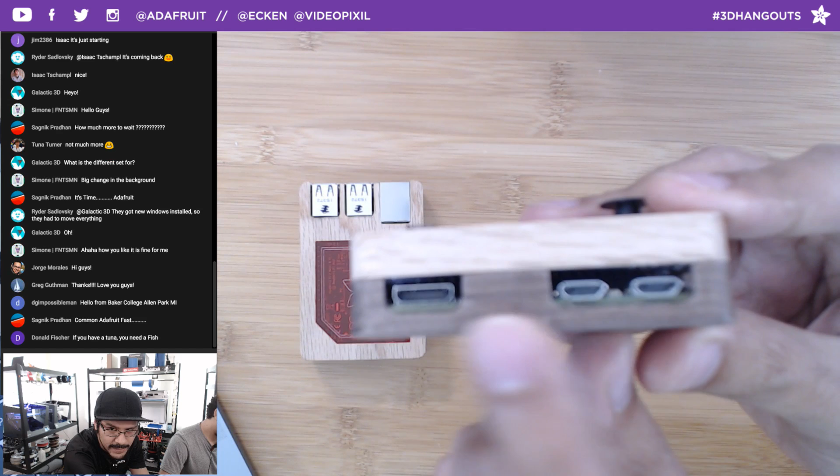The main thing, since we didn't do a show last week, let me show you - last week's project was CNC milled. This is the Joy Bonnet with the Raspberry Pi Zero. The one thing I wanted to do differently is take a look at these cutouts - they're kind of big. When you're using a 3-axis CNC mill, you can't make these undercuts or overhangs.

So what I end up doing is having to start the opening from the top of the case all the way down. These are two pieces, and you can see the cut is all the way from the top. So one way to combat that was to make this interesting little faceplate thing that is milled flat on the bed, oriented this way. This way you can get these nice and pretty holes and play with different materials you can see in there. That was pretty neat.

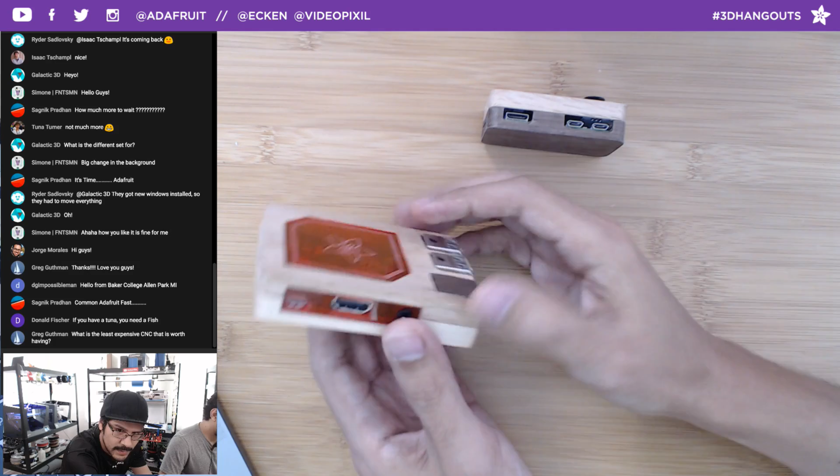Another thing is this is all friction fitted. I haven't done a case that's friction fitted before, so I had to guesstimate what the tolerances would be. For a 3D print, this would probably be a tolerance of like 0.2 or 0.3 of a millimeter, sometimes even 0.4. But for CNC milling, 0.1 was the offset I had on this inner lip. This little inner lip slides into the inner wall of this case, so that's how the two are held together.

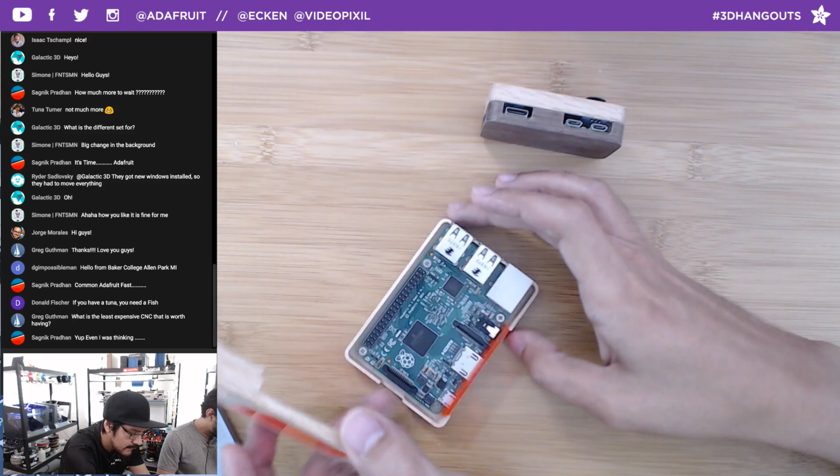I really didn't want to use screws to hold the two together. A lot of the time when you CNC something and need two halves to fit together, you end up using long screws to sandwich the two together. But depending on your application - I'm not going to be moving this around too much - so that's why I wanted to try this lip method where it snaps into the second half of the case. The other thing was these little things here.

I typically wouldn't add this for a 3D print, but I thought I'd give it a shot with this wood. It seemed to work out well. Another thing that didn't work out was the tolerances here - there was a bit of a tolerance issue, there's a recessed area here, so I ended up using E6000 glue to just glue these two pieces together. That ended up working fine.

This is done with an engraving bit, an 80-degree chamfer tool, on just an eighth of an inch piece of acrylic. So that's how that works.

So I put together a guide on some of the things I learned. If I switch to the guide, you can see a little bit. I'll walk through it very quickly, starting with some of the design stuff.

So when you're designing your case, you need to be able to cut in between things. An example here is that standoff you see. I had to increase the overall dimension of the case so I could actually get in there and mill in between those areas. I did want a really thin, slim case, but you can't get smaller than the tool bit, so that's why I did that.

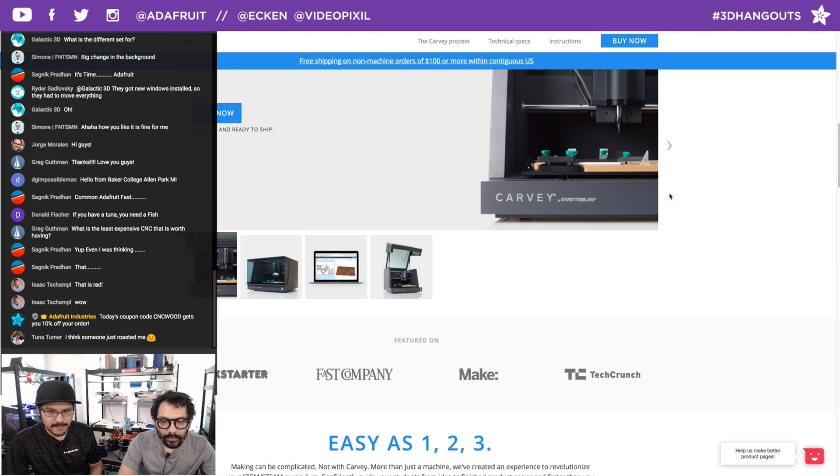The Carvey is another good option. It's got a bigger build volume. It's $2,500. The software looks pretty good. The spindle, though, maxes out at 12,000 RPMs. It uses the same collet, the ER11 collet, so you can use the same tools. It's a good option if you don't want to do PCBs with fine pitch, you can try this out.

Supports G-code. Another one, this is the thing Pedro was talking about, this is the one from Carbide 3D. This is the Nomad, fully assembled. I think it's fully assembled. I sure hope so, I would be surprised if it's not for 2,500 bucks. It doesn't come ready to run out of the box though. It has MeshCAM, so you can turn your STLs right into your G-code, which is kind of nice.

I think the RPMs max out at 10,000 RPM, but it's got a pretty decent build size. I think it's 8 by 8 by 3, so it can do some nice depth, 3 inches.

Yeah, and again, fully enclosed, nice spoil board. It has some nice built-in probing, so it'll probe itself every time. I think the Carvey does the same.

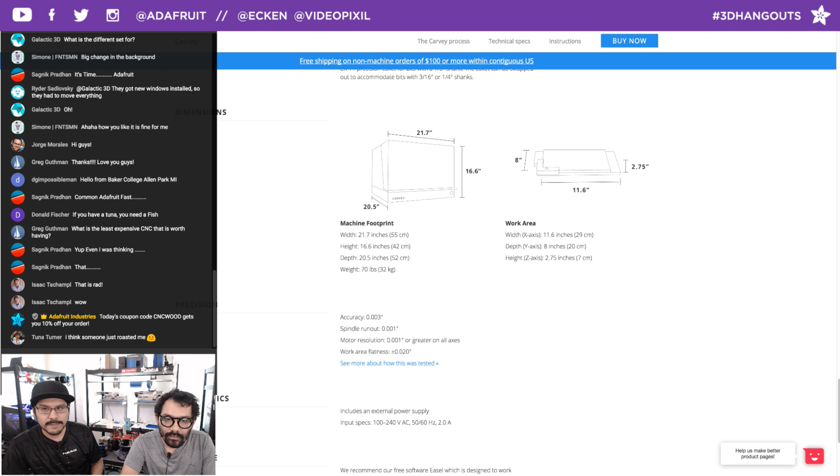But somebody in the chat on YouTube mentioned openbuilds.com. So if you really like building your own machines, check out Open Builds, and you can build your own for I don't know, $100 or so.

The Shapeoko is another thing, but I'm not sure if I could recommend that. Kirby has one, and I think Phil B might have had one, but the assembly instructions are a little bit iffy, so I'm not sure if I can recommend that.

I think Todd had one as well, and he had to do a lot of workarounds to get it assembled. Yeah, I remember he had an X-Carve too. The X-Carve comes in a kit, or I think fully assembled. I'm not sure. But anyway, a lot of options out there.

Nice little tutorial for anybody wanting to make that transition from 3D printing into CNC.

This is more like a book report than step-by-step instructions on how to set it up. All of the paths are going to be different for different machines, especially for different stock. So my G-code's not going to work with you, but you could offset it, though I'm not sure if your software can offset it. So, hey, options are out there.

Cool, so that's this week's project. Hope you guys like it.

And last week's too, just in case, since we were gone, we just wanted to mention the Joy Bonnet. We have a Raspberry Pi Zero on the inside.

So just hook up a monitor and you're ready to start playing all those console retro controller games, which is pretty cool. It looks pretty tiny, and the buttons are laid out pretty nice, so it's not so tiny that you're going to be mashing two buttons at the same time.

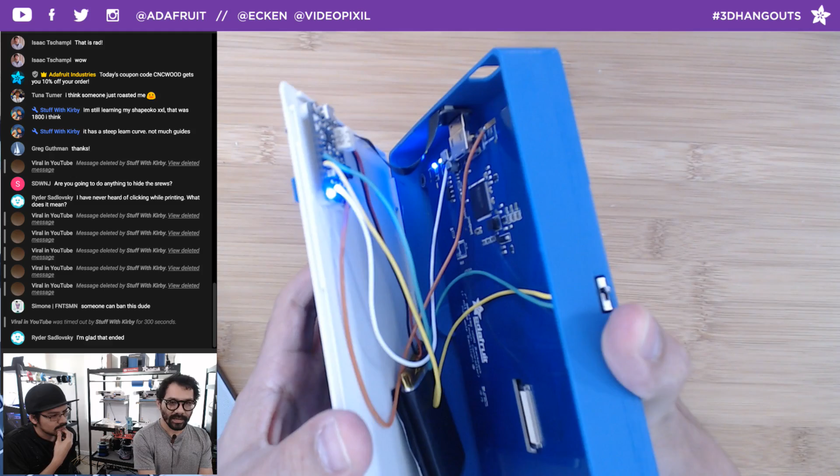Oh yeah, and of course, like I said, it is a rework, so all of the attachments for hooking up all of the mounting - instead of using screws everywhere like we did on the last one, we're using all of the very fancy nubs that Noe started using on all those. So very easy to disassemble, take a look at that - everything is just snap fit together. It has a very nice tight tolerance on that, so they can all stick inside there without having to use any screws.

Add nubs to all the things. Yes, that's good - well, I couldn't add it to the sword. I really wanted to add nubs to the sword, but there's just way too many curves on that, so it's easier to use screws. It really depends on the project - if it's just a nice box, it'll work perfectly for that. But we'll talk about this more afterward, after the sword. So really close.

Did you want to highlight the... the what? The HDMI connectors, like show them off individually?

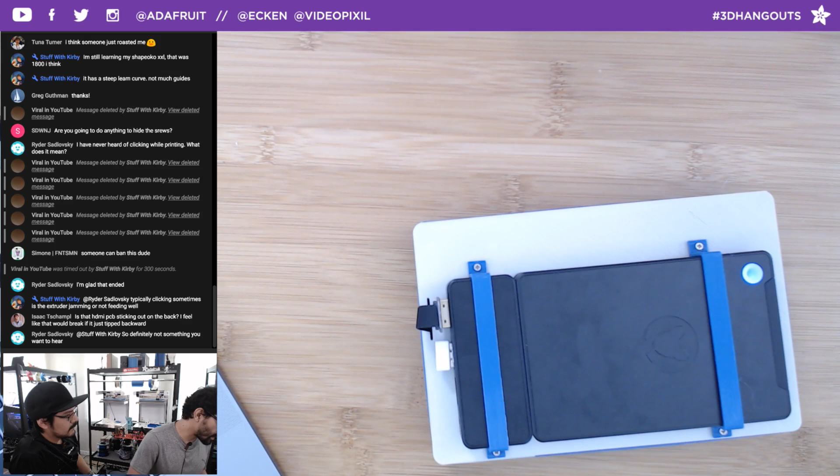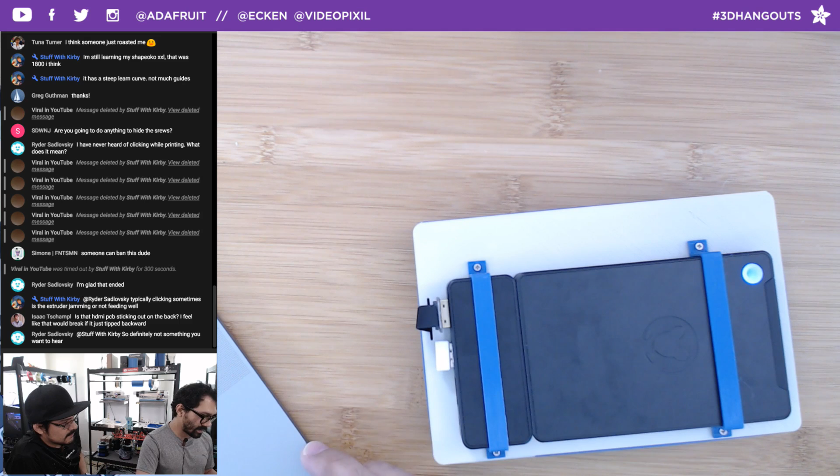Like I said, this never works, it's one of those things where you finish one complete build and it's like, oh yay, let me just print another one, and it just keeps failing on every part. So it goes to having to do a weekly project.

All right, cool, let's take a look at this week's layer by layer. I think you have one I do, the Joy Bonnet. I'm going to publish that later today, probably around 3pm Eastern time, but I wanted to show you guys real quick what got me excited about this one. So let's go ahead and flip to this guy and then go over here. So this is the Joy Bonnet.

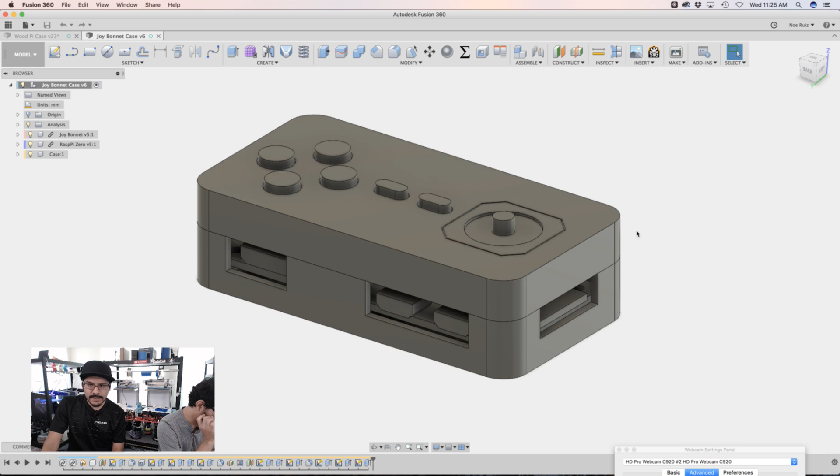In this week's Fusion 360 tutorial, I show you how to assemble this bottom piece here for the Raspberry Pi. But one thing I really wanted to show you guys is how adaptive this design can be.

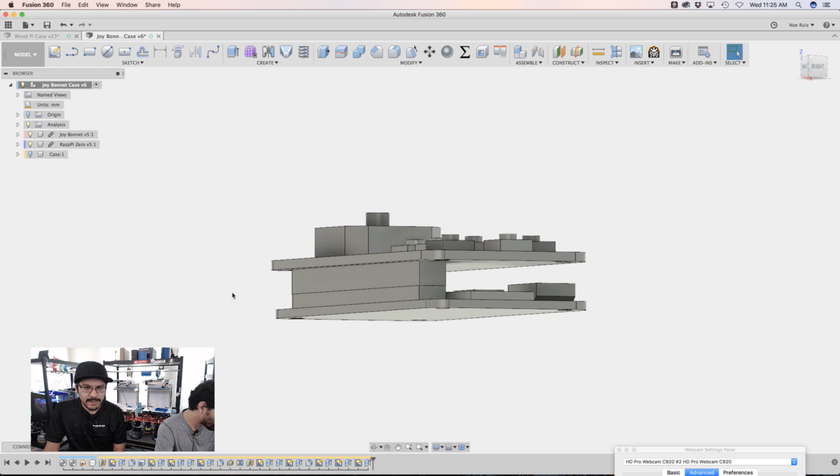Let's take an example where these two pieces are pretty flush together, but let's say we don't want them to be flush. Let's say we want to use the regular headers that aren't low profile. That means the distance between these boards has to be a little bit bigger, right?

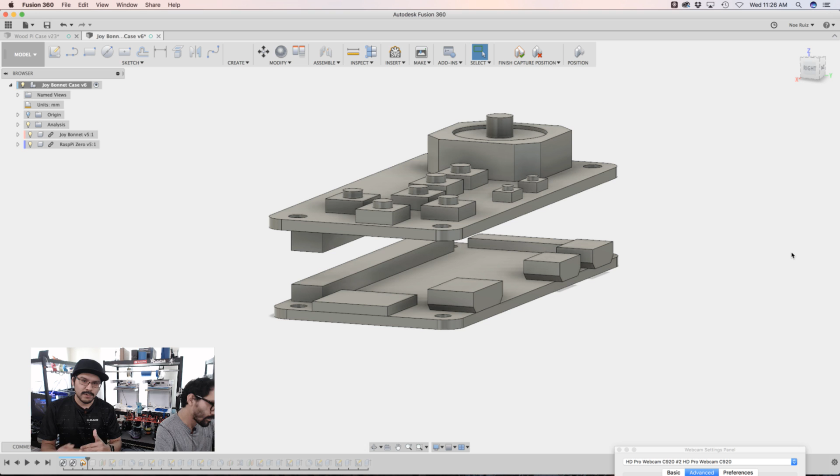So if I go in here to my capture position, I can adjust this. I can say the Joy Bonnet is actually a little bit more elevated, maybe 5 millimeters. When I hit OK, normally what we would do if we designed it a different way, you'd have to update your extrusions.

But in this case, when I hit update, hopefully everything gets updated. Look at that, a little bit different, but you can see what's happening here - the cutouts are adaptive. They're growing with this bottom piece here in the surface.

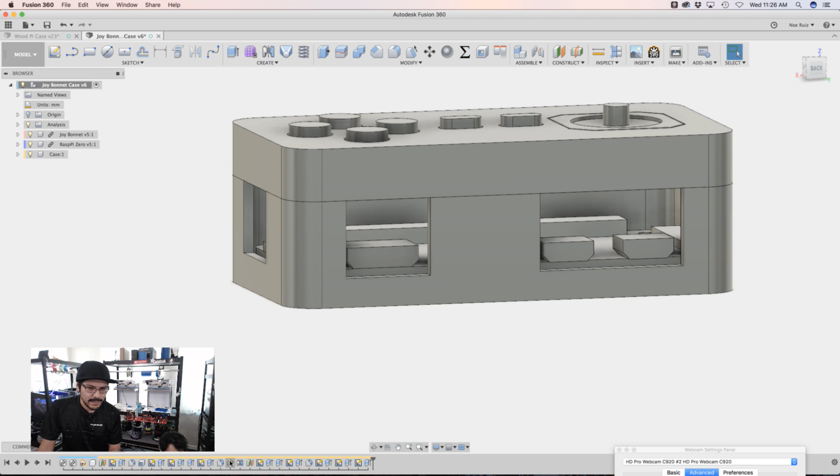The way that's happening is I'm using a construction plane to do that. So if we go over here into this little construction plane, everything's being derived from this construction plane. Can't seem to edit it, so let me hit edit feature.

Instead of having to readjust your surfaces or use the push and pull command to push things out, I can just update this construction plane, the offset for it, and things automatically get updated because I'm drawing on top of this construction plane.

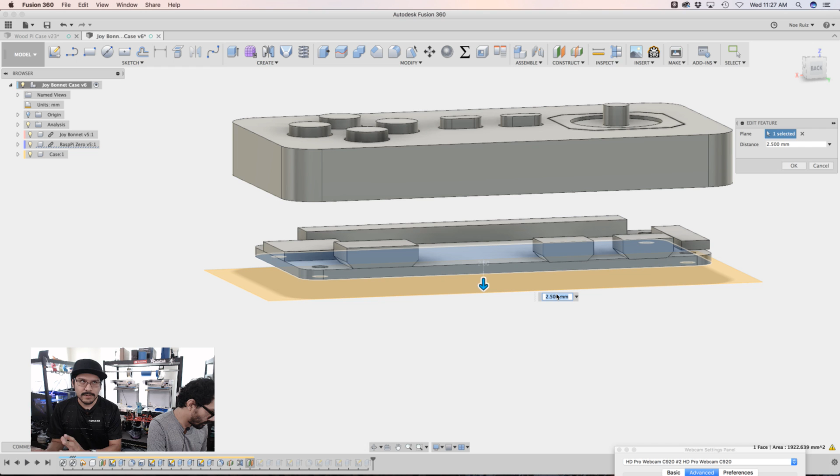So I'm going to change this to like 5, and you can see that I just moved 5. Not only that, but it's parametric in the sense that if I do section analysis, you can see the standoffs have even updated - those are the corner standoffs back there. They've automatically updated, and I don't have to do too much.

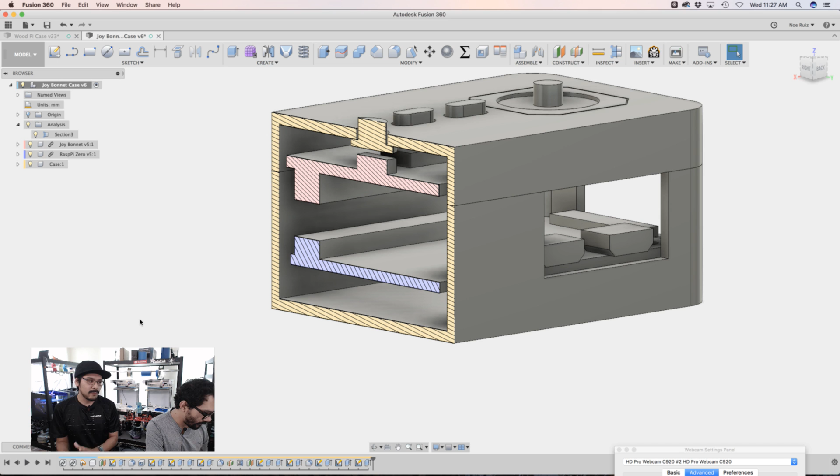So really quick way to modify your design and not have to do too much work, because a lot of times I do a lot of changes and I have to start designing it in a way where it's adaptive to those changes. I'm really excited about that. I'm starting to use construction planes more and more these days because they work really well.

Of course, using your extrusions when you're extruding stuff, instead of adding a distance - let me see where I do that, which is typically what I do - you see that extrusion, it's not actually a number, it's saying there's an object behind it, but the number is adaptive. It'll always update whenever this surface is changed. That's why it's updating like that.

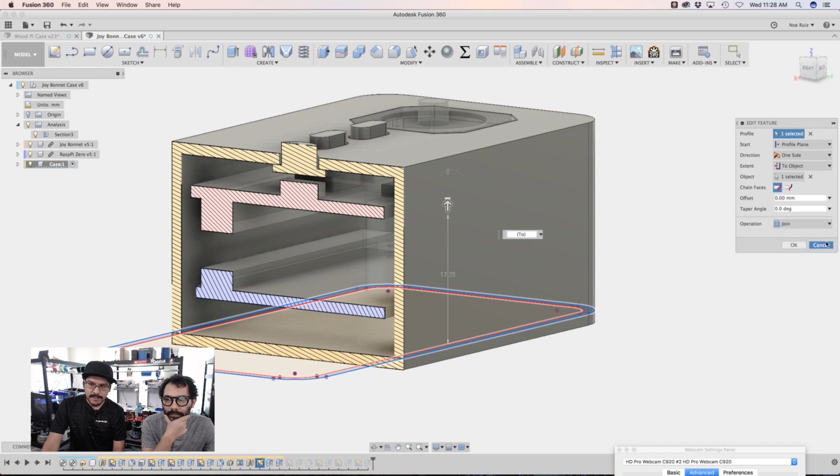So let me just undo all that. Pretty cool, I'm really excited about that. I'll be doing more of that type of stuff.

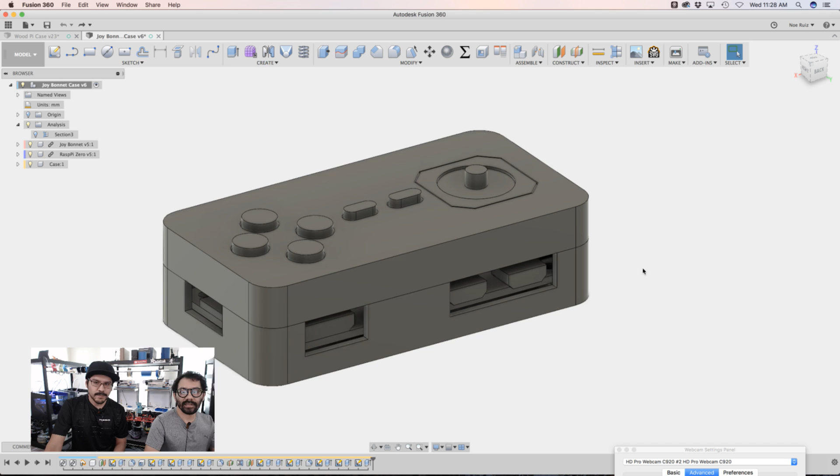Hopefully that helps anybody out who's working on a project where you're designing for changes in mind. If you don't need that, then you don't have to design this way, but whatever you're printing, you're definitely going to need it somewhere down the road to change something - for tolerance testing it's a great thing, I think. But it might be a little bit different. I talk more about that in layer by layer. That's just one of the quick things I wanted to show off. Check it out.

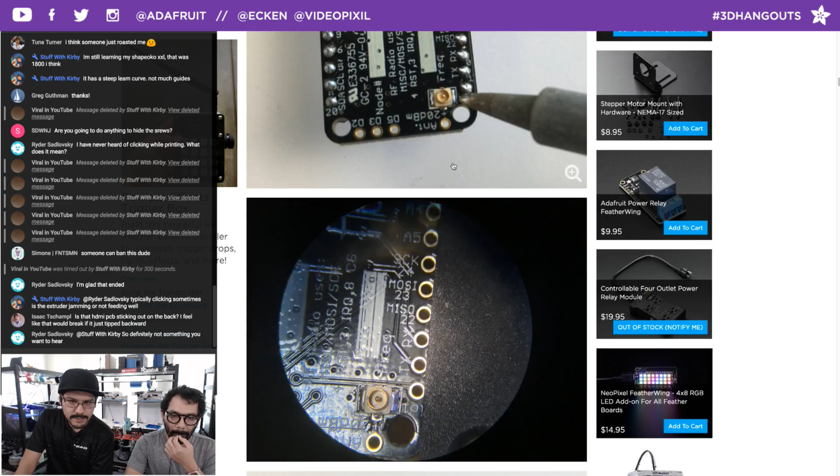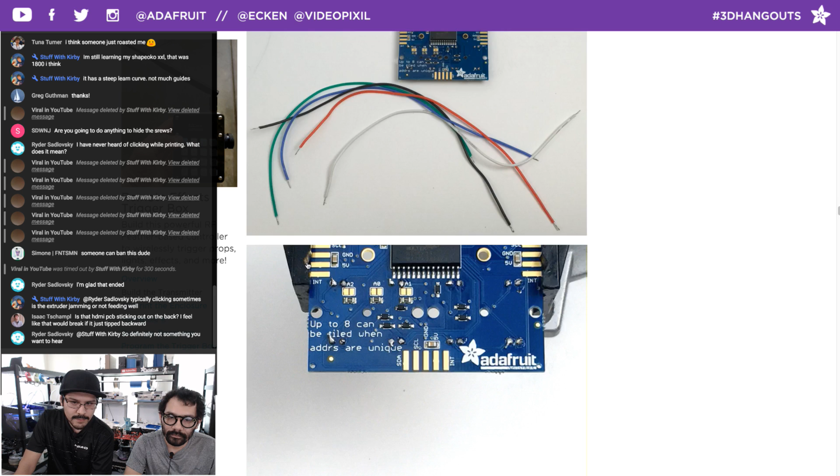John Park did a great job on the assembly instructions. Everything's really thorough and thought out. Circuit diagrams galore, and great use of the trellis for updated designs too, for remote triggers. He added the little switch holders and stuff like that.

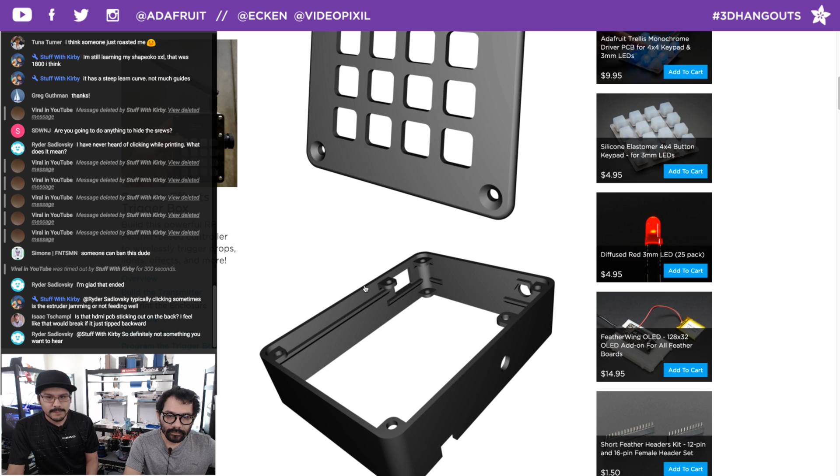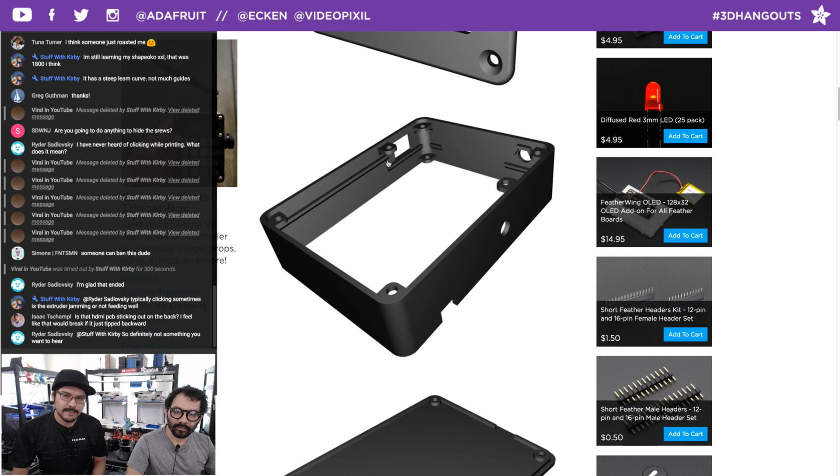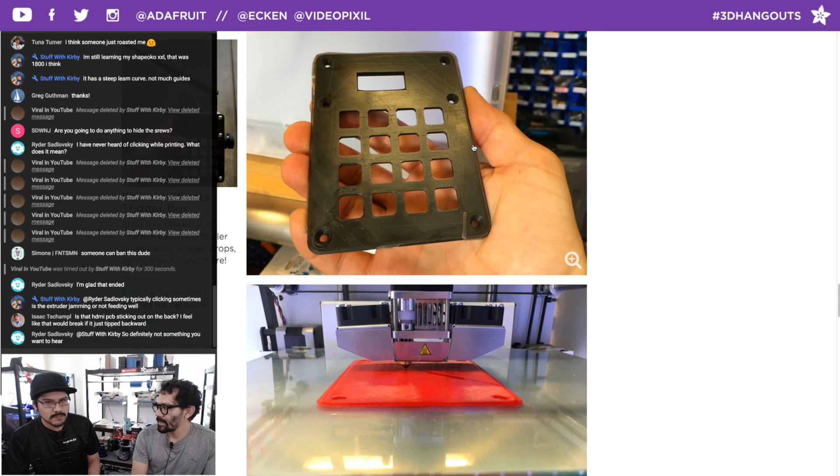So really cool. This was originally designed as a 123D design, so it didn't have much parametric options back then. But you can easily import this now into Fusion 360 and go to town with it, like adding a draft to those little tabs there. That's really the most difficult thing about some of the older projects we're reworking, because they were all designed in 123D and not editable in terms of adding dimensions. But once you get them into Fusion, they're pretty easy to work with.

It's just figuring out where all the, because of the way we used to design in 123D, there was like version 1, 2, 3 before we did a union or a boolean on it and all that. So, great guide.

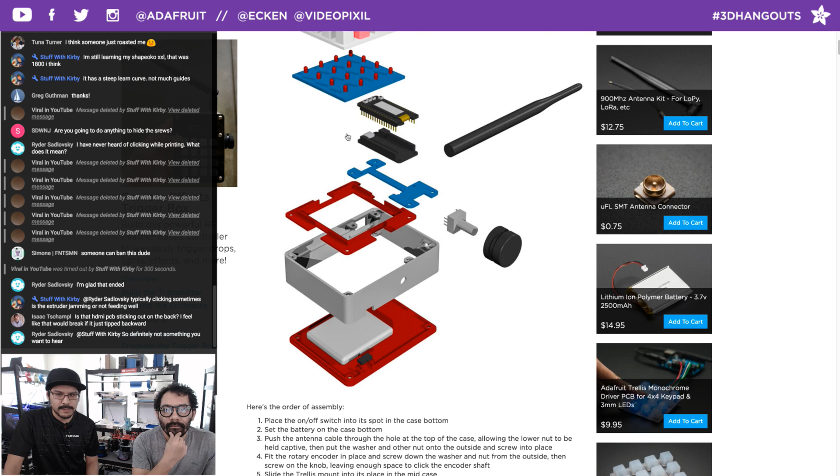Nice little battery holder too. Pretty cool, that's a nice way to do supports for materials there. So a lot of great little tips you can take away from this, even if you don't want to build this project. You can still kind of walk through it and see, and it could be for any project too. You'll walk away with some really good tips.

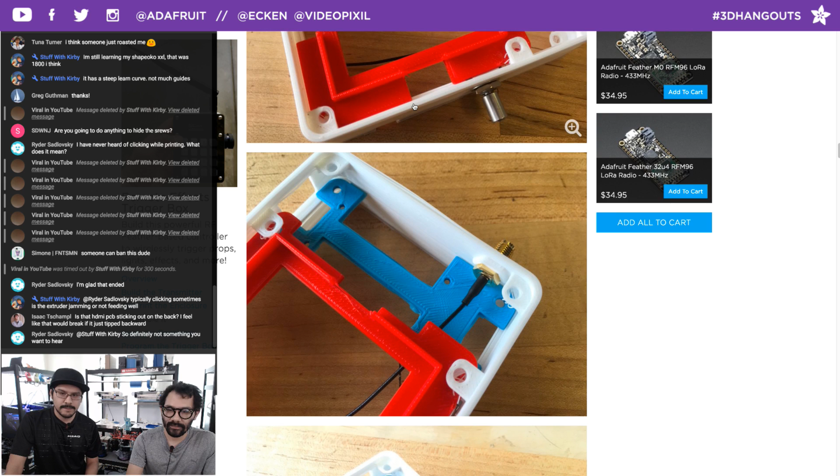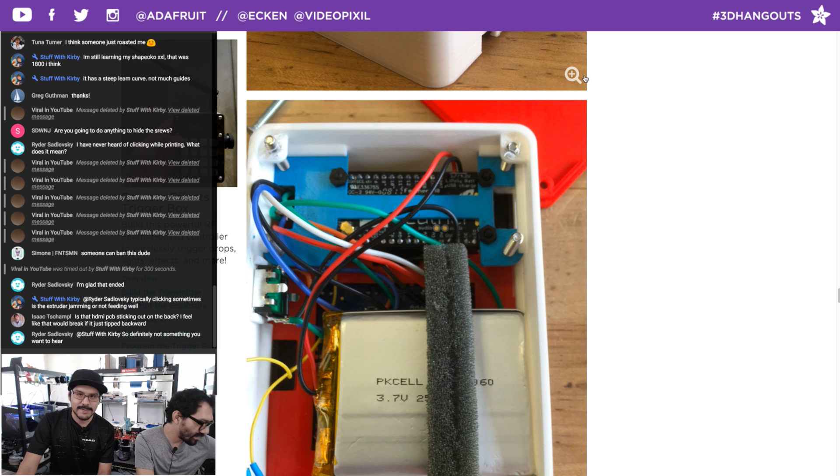This is pretty cool, definitely one of them. Great use of those M2.5 screws. I could be looking at this all day. It's a nice, long, lengthy guide, so get your cup of coffee and just read the John Park guide. Check that out, that's of course at learn.adafruit.com, right on the homepage there.

Next up, we got, we were talking about the Supersoft HDMI cables. You wanted to recap on the failed Ninjaflex wheel experiments. Oh yes, I completely forgot about this.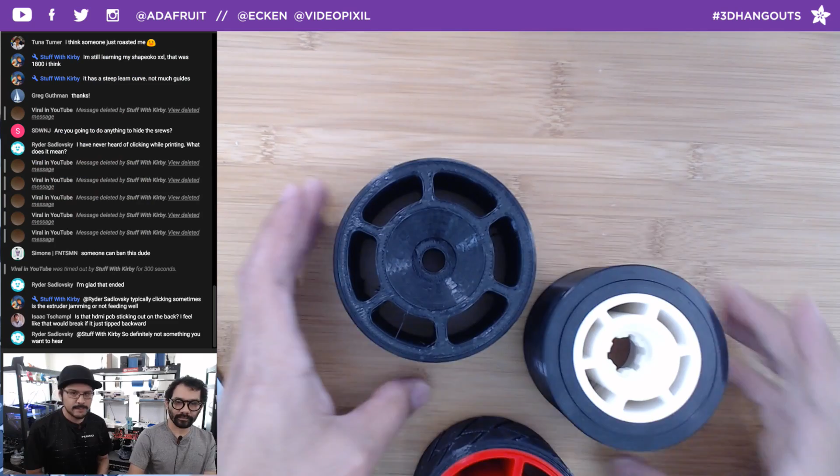So a couple weeks ago I really wanted to experiment with making a 3D printed wheel for my longboard. I wanted to use Ninjaflex and ABS to make this longboard wheel. So this was 3D printed, this red piece here is ABS, the black is Ninjaflex. This is a fully Ninjaflex tire wheel, just kind of prototyping and playing with the different shapes and trying to get the tolerances right.

This obviously doesn't work because it's too floppy. As you skate on it, it just kind of flops around, like a flat tire, right? This version, the tolerances worked out okay, I could skate on it, but there wasn't enough Ninjaflex so it was really kind of a hard ride. Didn't feel really good. So then I figured, just increase this and decrease this.

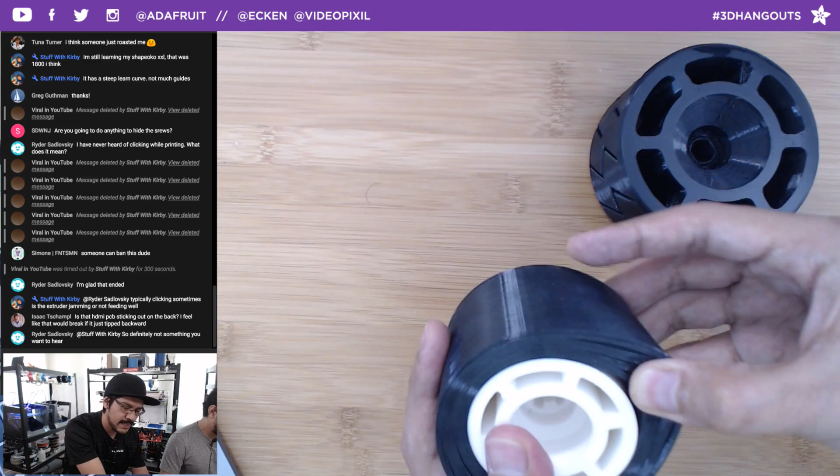So this is what I came up with. This is not dual extruded, it's printed in 2 separate pieces and they're joined together, not with glue, but with a little nub thing, a little key inside there. I can't take it out, so once you install it you can't take it out again. But the main problem here is that none of these layers bonded with each other, so they're all kind of loose.

When it was printing it looked like it was gonna be fused together. The only part that fused together was this Z seam here, the seam where everything's kind of looping on the perimeters. So this is all perimeters, like 4 shells, or maybe 8 or 10 shells. There's no infill, it's just all perimeters.

That didn't work well, so I kind of shelved this idea. Skating on this doesn't work well, it tends to fold in on itself, and these parts just didn't bond well. But this ABS part is definitely strong enough, this is all perimeters too, so it's like 100% infill in a way, but it's all perimeters. It's a nice clean tool path of just concentric patterns over and over again.

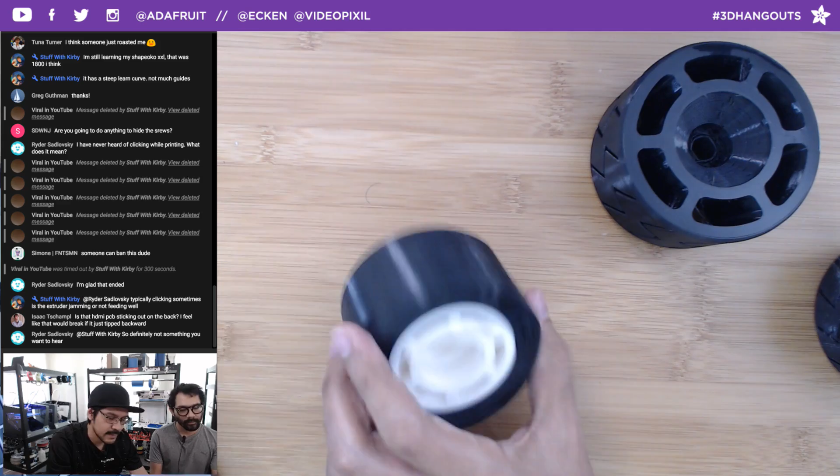But this was a fail in terms of does it actually work? No, not really. It fits, but the Ninjaflex just didn't fuse these layers properly. I could try messing with that, but I probably won't.

I moved on to a separate project. Instead of wheels, I'm now doing a truck riser, which I'll talk about next week. If you follow me on Instagram, you can see what I'm testing there - a nice integrated way of adding lights to your night rides.

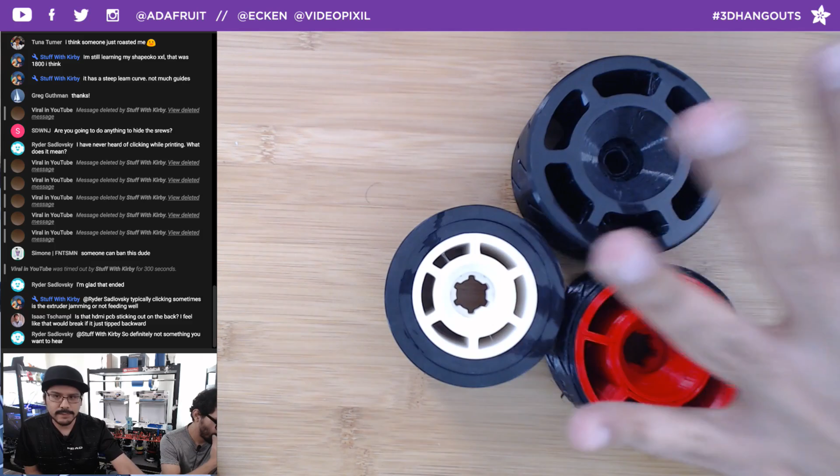I think that was a better idea because there weren't really any electronics here, just more material properties and seeing if that works. Although some recommendations were to make a 3D print to make a mold, then resin cast with LEDs inside. That could be a cool option.

Maybe we'll do it down the road. Another option for the truck riser - I really like that idea. The end goal is to send one to the Braille Skateboarding YouTube channel. They can skate it or break it. You make it, I break it - and they'll break it on the first try.

Can you imagine that? The truck breaking, landing on the 500 milliamp LiPo - that would not be cool. Like it's skating, and then it just explodes. First try, it exploded. I know Fetty would break it.

Anyway, under extrusion on that - for the wheel, I don't think it needs some of those layers. If you look at the zigzagging on the side, that's great layer bonding - there's no under extrusion here. It looks really nice. Look at the distance between the layers, it's connected on the perimeters. It's like the extrusion width just isn't enough.

It's just too thin. As you start increasing it, your tool paths start changing. So it's like, I really want these concentric patterns to kind of lighten the load on printing, but maybe that's the wrong approach - maybe it really does have to go back and forth.

Or is our audio okay? I was just trying to clear my throat. Excuse me. Ooh, listen to that click. More clicks.

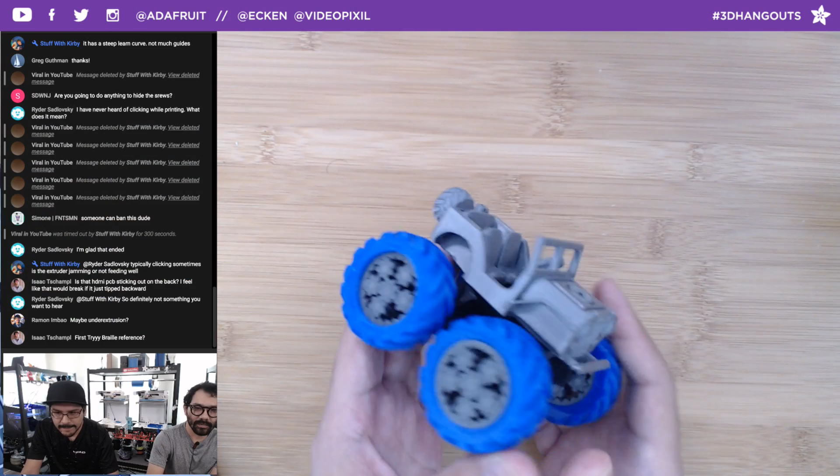Actually, what about this guy? That's a bit of a shock. So last week's Time-Lapse Tuesday - well, it's a community make. Yeah, it was this really cool remix of the monster truck, this time with a Jeep version in it. And the wheels are these really cool bearings that spin around. This is on Thingiverse, if you want to check it out - it's by Bill Line.

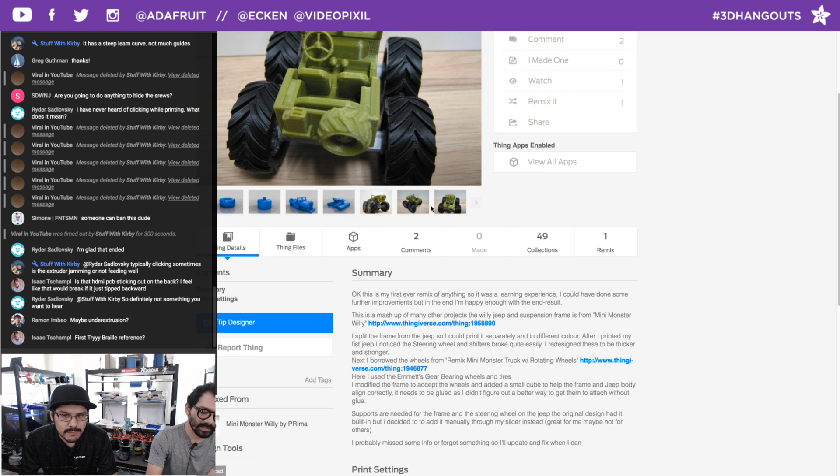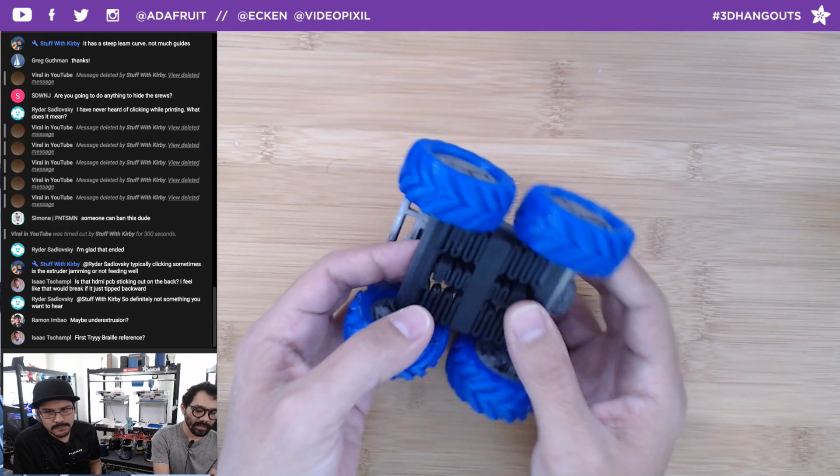Overhead - so this is a really cool way of making springs on your 3D prints with a rigid material. You just use this little zigzag and you're able to have these bend and fold, so we have suspension that can go up and down and then left and right.

Pretty neat. And then the tires were printed with Cheetah Ninjaflex on the Ultimaker 3. I just used the default profiles in the new Cura 2.5, and that worked out really well. I really like the detail at only 0.2 millimeter layer height we got on all these. The funniest thing is the spare tire that would totally not fit on there, but there's lots of cool little designs inside for the seat and the steering wheel. I did have to use support material for this.

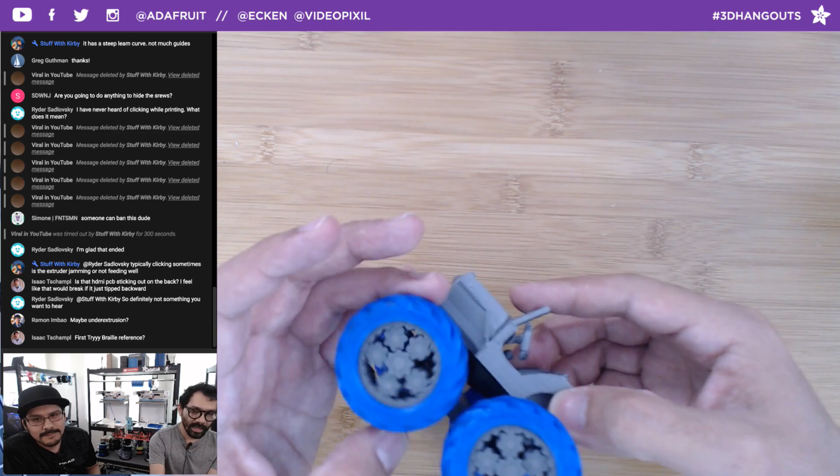And then some people were asking how we got the bearings to print. So I did have to do a horizontal compensation, which means shrinking the size of the gears - inside Simplify 3D, that'll do that for you. It takes the outer shell and sort of shrinks it. I had to do a negative 1.2 millimeters for that, which allowed the bearings to spin very well. That's a really big value - 1.2, yeah, that's crazy.

Otherwise, all of these will fuse together. Even at negative 1.2, they did fuse a little bit. I had to use pliers to hold onto one of the bearings and push it down or up to get it loose from some of the stringing that happens with printing. And that worked out really well.

Very awesome job on that. Sometimes they still get stuck, just because of the orientations of the tires, I guess. Yeah, so it's not... they could definitely get 100% stuck.

Free spinning. Well, this one especially, I think I used a 1.3 on this, so they're actually smaller. Yeah, I remember you added to it, it skipped too much, and they fell out.

Yeah, it took quite a bit of trial and error to get this to work, just because the tolerances on printers are so different. But it works out if you know what your offset is for that. Yeah, it's going to vary from printer to printer.

Filament to filament, I should print them all at 1.2. This one's 1.3, so it's smaller, it misses a track, and then grinds and gets stuck up against one of the other bearings. It was interesting, though.

I like that you printed a version where they fell out, because then you can actually see inside and see how the worm gears are kind of designed. The reason why they're not being pushed out is that there's a little bit of a V shape that keeps them contained inside of the main planetary system here.

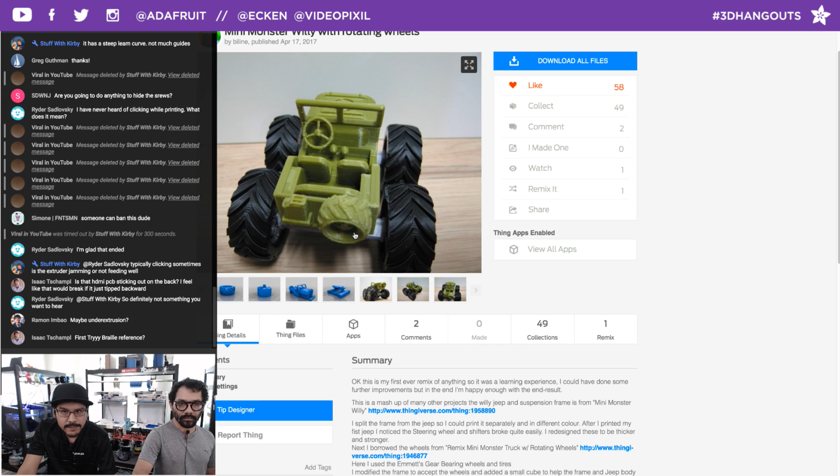So, make a fidget spinner. Cool. All right, again, if you want to check that out, you want to print it yourself, or have somebody print it for you, you can check it out. It's on Thingiverse, we'll have it linked below, and I think it was shared last week. Thing 2255-26-1. Oh cool, so check that out.

All right, this week's Time-Lapse Tuesday was this cross-section of a face. Let's see where it is here. This one, yeah, this is an eyeglass company. They make glasses, I suppose.

Yeah, so this is Vinylized Eyewear. They make frames out of recycled records, vinyl records. That's awesome, really cool. So they're using this as a display in some of their stores. Yeah, it's a really cool use of 3D printing.

Yeah, they have different people, different faces. Somebody asked if this was the Nefertiti face, like a cross section of Nefertiti. Nope, this is somebody named Betty. There's a Betty right here. So you can pick the kind of face shape that you want.

And what's cool about this one is that you can use these as just holding on to your glasses, and as we showed in the video, using like the Google Glass, or... oh my god, it's too bright.

Woo, let's just show it over here. Looks way better. You're drunk overhead. Go home, man. I know.

So we have a nice little hook on the back, so you can mount these to a wall, or as they show in their video, they just put it on, like inside of a brick wall. And it has the perfect size of a head, so you can hold whatever glasses, sunglasses, kind of whatever.

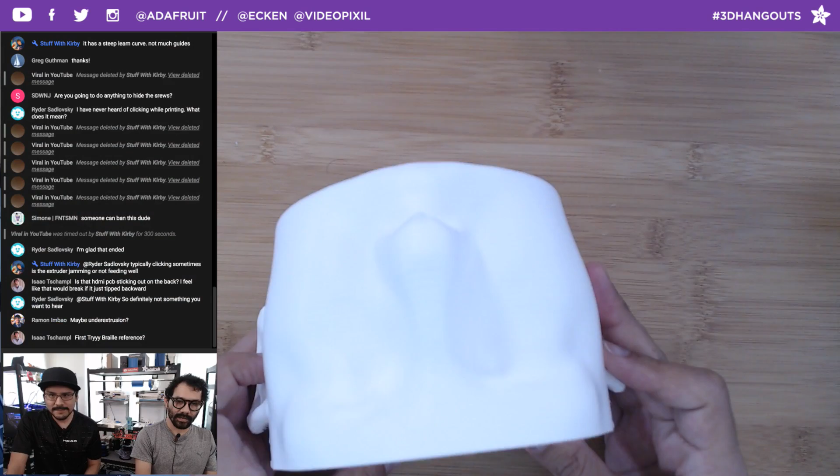Print anyway, how long did it take to print? I think it took about 3 hours. It's noted in the Time-Lapse Tuesday video though.

0.2 layer height? This is 0.4 layer height, and we're using a 0.6 millimeter nozzle on the Sigma BCN3D. Yeah, can't even see the layer lines, kind of. You can see them, I mean, it's this camera. Yeah, sorry, definitely see them there. That's weird, it's pretty big.

Again, nice little creative way of making eyewear displays. Check it out on Thingiverse, there it is. Looking rad. And I think we can jump over to this week's Q&A.

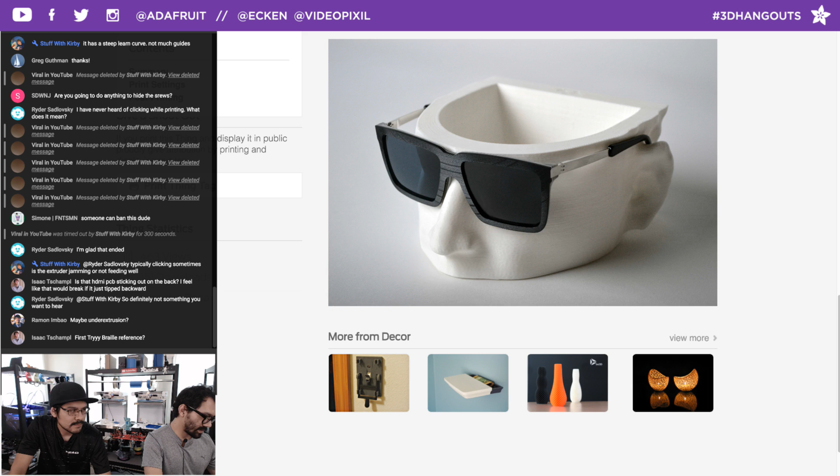I'm still doing the things. All right, oh sorry, so I just got some really quick projects. This one's from AT Makers, Bill Binko.

Put together this kind of watch linkage design for mounting an eye gaze. So I'm just going to read the comment. This is really nice. This mount holds a Tobii EyeX eye gaze camera directly under the monitor and maintains its orientation.

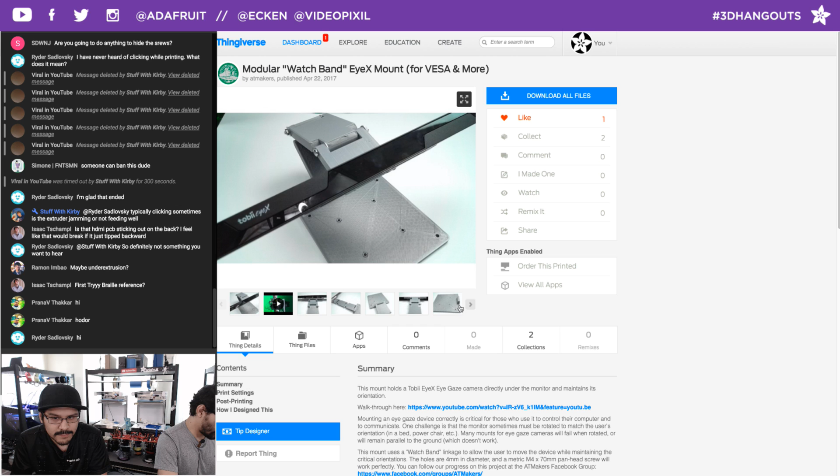Mounting an eye gaze device correctly is critical for those who use it to control their computers and communicate. One challenge is the monitor sometimes must be rotated to the user's orientation, say if they're in a bed or a wheelchair. This is a great way to get all the orientations for anyone who needs assistive tech. Great job, AT Makers, Bill Binko. We'll definitely share this on the blog, and there's a nice video walkthrough of it you can check out.

Next up, this is a giant Super Nintendo controller, basically a really, really big joystick thing. It's awesome. Here's the normal one, here's the big one. If you have Wreck-It Ralph hands, this is for you. I like the joystick added to the D-pad. There's enough room in there for a Raspberry Pi, though there isn't one in there currently. Parts were probably printed separately and glued together. He even got a 3D printed NES on there. Very cool.

Angry Balloon on Thingiverse made a nice Python script that lets you control brightness to save battery life on the PiGRRL Zero, turning the screen down to 20% or 50% brightness. You can use one of the buttons to control the backlighting. The Python script is available, and this is a great little upgrade modification to the PiGRRL Zero. I love seeing these things. Great stuff.

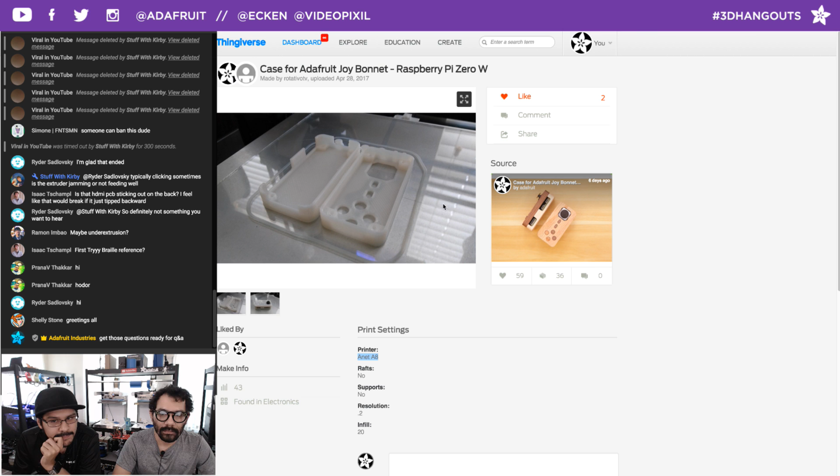Somebody 3D printed a Joy Bonnet. This person on Thingiverse printed the Joy Bonnet on the ANET A8, which is a clone of the Prusa style DIY kit printer. Looks pretty nice. Did they say if any offsets needed to be adjusted? Nope, works perfect. That's cool, because there's no real friction fit stuff, it's all screws to secure them. So it all worked out. There you go, you can print it out yourself. First try, very cool.

This is from Sufficiently Advanced, a great YouTube channel, lovely person. He made this 3D printed PLA spider grip thing, very awesome. Watch the video if you haven't already. He actually tested it and it worked for a little bit, holding his weight, made of PLA. He changed the design afterward. He's printing it on his Flash Forge, a CTC Replicator 1 clone. Love this guy's stuff, he does some great work. He also made the real life Thor hammer, great content. It was surprising how he kept the truck risers from breaking using just PLA. He's dressed up like Spider-Man, it's funny, this is awesome.

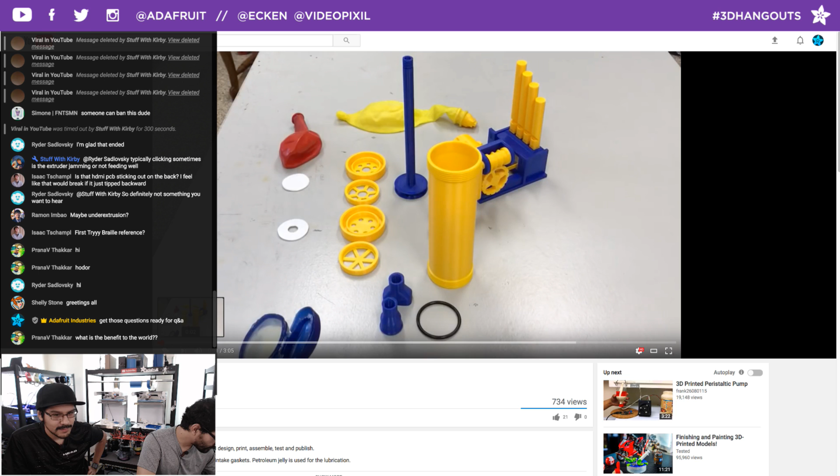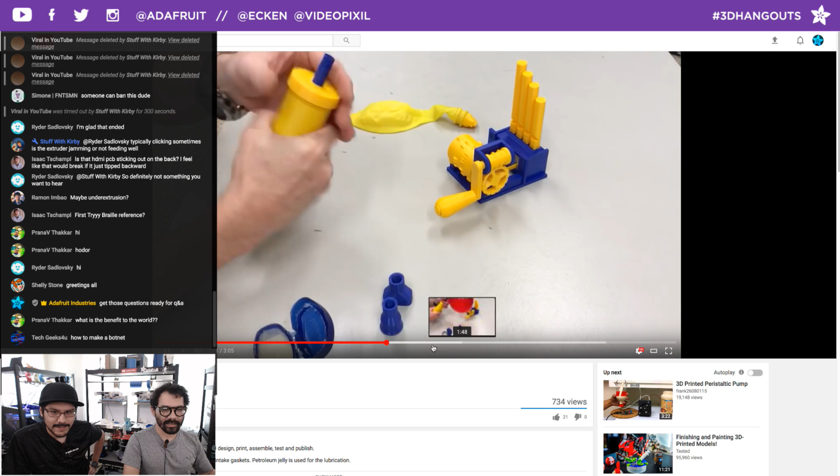This is from Walter, I believe, though I may have the name wrong. This gentleman does some great 3D prints. He made a 3D printed air pump for pumping balloons, air powered. I think we showed this a couple weeks ago, but not the air pump itself, just an assembly video of it. Pretty cool, check that out.

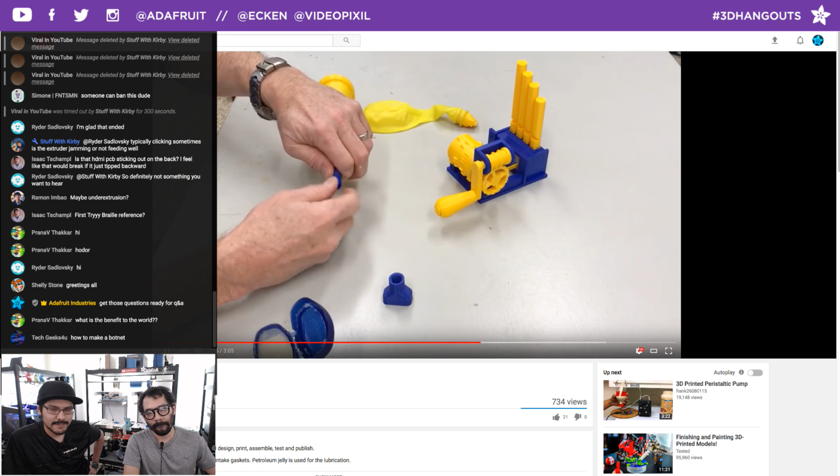Last thing, Wintergatan made 3D printed drums, super dope. Love his videos, love his work. Crazy maker guy, very, very cool stuff. Check him out as well.

Last one, Kirby sent me this, a cool new method of doing time lapses. He has an end switch on one of the sides where he's printing a perimeter that activates the camera, triggering it after every layer. It's pretty dope, it's like it's growing and you can't see the tool head. This is a great option for printers with a massive tool head that covers up the entire print, like some dual extruder Cartesian direct drives, kind of like Flash Forge as well. They're pretty big, so this is really cool. Check it out, that's it, we'll have more stuff shared.